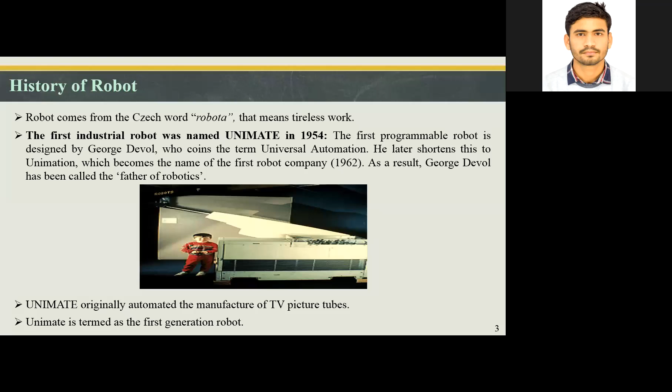The first robot was designed by George Devol in 1954. He also established the first robot company, named Unimation, in 1962. That's why he is considered the father of robotics. His first automation was employed in the manufacture of TV picture tubes.

Unimate is termed as the first generation robots.

Later, in 1980, the robot industry entered a phase of rapid growth. Many industries and industrialists introduced programs and courses in robotics, and thus advancement occurred in the field. In addition, sensing devices and path control capabilities were introduced by this time.

These type of robots are termed as the second generation robot. In the previous slide we showed the automatic manufacture of TV picture tubes; this was the first invention, termed the first generation robot. This type of robot, with the addition of sensing device and path control capabilities, is termed the second generation robot.

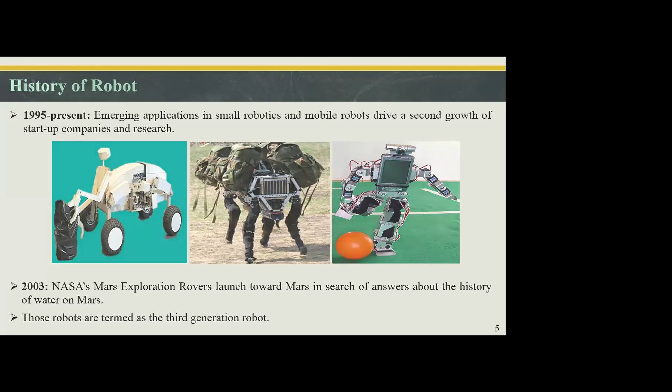So far, we have discussed the history of robot. Now we will go for the term robot. What does the term robot mean? According to the Robot Institute of America, a robot is defined as a programmable, multifunctional manipulator designed to move material, parts, tools, or special devices through variable programmed motion for the performance of a variety of tasks. In short, the thing that is programmable and performs multifunctional capabilities of moving materials, parts, and special devices in accordance to the prescribed program is termed a robot.

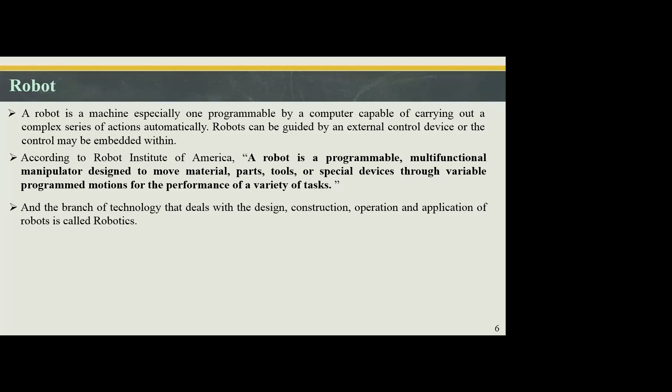The branch of technology that deals with the design, construction, operation, and application of robots is termed robotics. Here we can see three different types of robots doing different jobs: the first one is doing office work, the second one is trying to grip something, and the third one is involved in packaging boxes or some material.

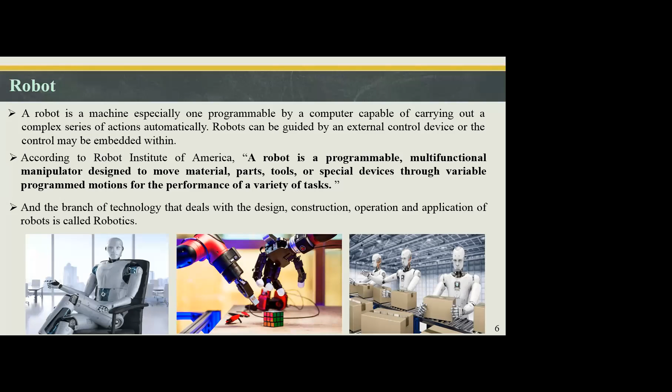Now we will go for robotics and manufacturing, or the relation of robotics to manufacturing. Robotics and manufacturing are termed a natural partnership. For maximum efficiency, safety, and competitive advantage, there is no alternative to automated solutions. In case of repetitive tasks, it is very encouraging to focus on the speed, accuracy, and durability of the robots. In such cases, robotic automation can play a vital role.

Automated robots work efficiently at jobs which are intricate or complex for human beings to perform, such as lifting and holding heavy materials. In addition, robotic automation allows companies to compete in global markets. Besides, this implementation also increases productivity, worker safety, satisfaction, and a better bottom line, or a flexible outcome.

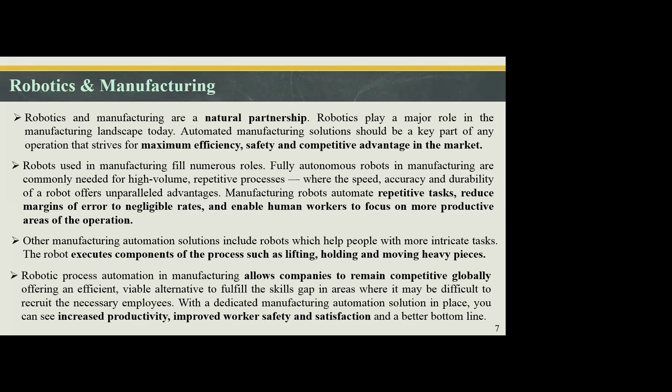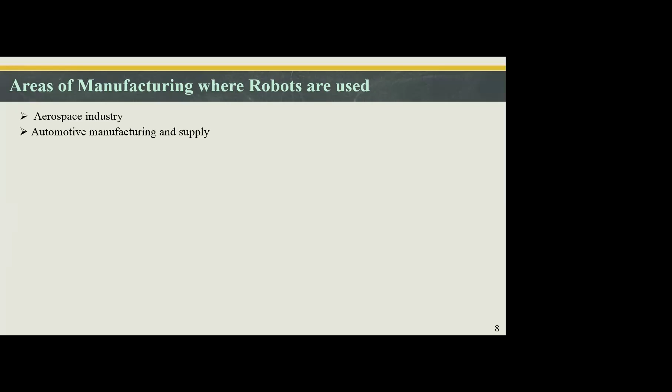Now I will show you some areas of manufacturing where robots are used. Robots are vastly used in the aerospace industry nowadays, and in automotive manufacturing and supply; from the very beginning, robots are used vastly in automotive manufacturing. Robots are now being used in agricultural harvesting and picking up vegetables or other materials.

Robots are also used in chemical, rubber, and plastic manufacturing industries, and in the electrical and electronic sector. Food stuff and beverage manufacturing industries hugely use robots for food preservation units, or to remove chemicals from the food stuff and check whether it is chemical free or not.

In the glass, ceramic, and mineral production industries, robots are used. In 3D printing technology, furniture manufacturing for painting or other tasks, and assembly. In power plants, specifically nuclear power plants, healthcare, hospitals, patient care, surgery research - in these sectors, robots are used vastly. In addition, robots are largely used in laboratories, military sections, mining industries, and different types of transportation devices, and also for entertainment purposes in home or theater.

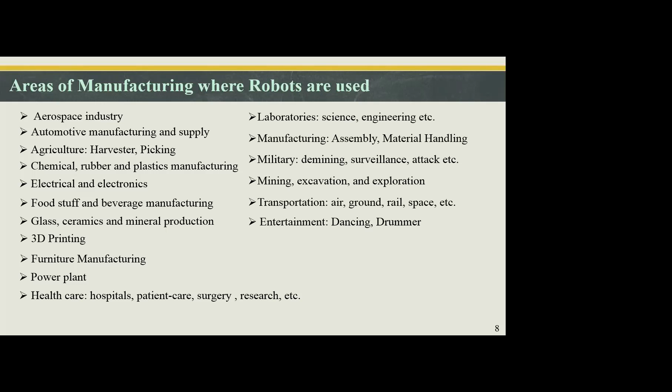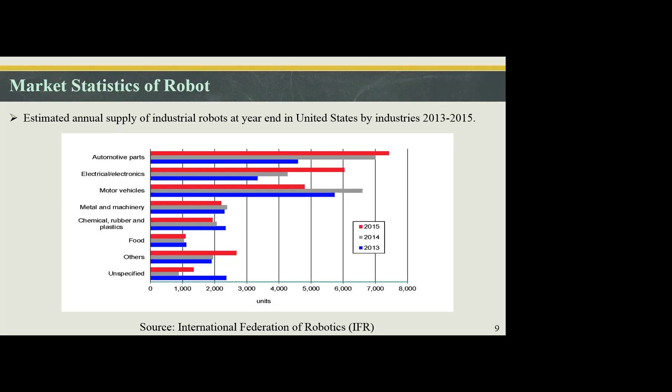This is because of the stable nature of these robots in this arena. This above data has been collected from the International Federation of Robotics, shortly termed as IFR.

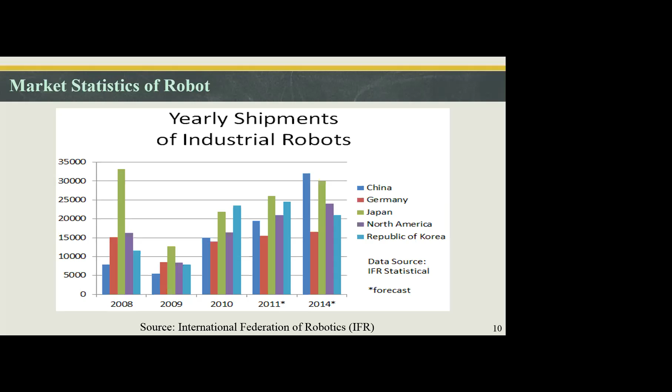In the year 2008, Japan utilized a huge quantity of robots in their production compared to other countries shown here. In 2010, the Republic of Korea consumed robots at a higher rate compared to other countries. But in 2014, China has crossed Japan in the utilization of robots. This statistic is also collected from the International Federation of Robotics, IFR.

Lastly, in this slide of market statistics of robots, I will show you the demand of robots in the factories of China with the advancement of year, and other countries also. In comparison to the previous year, in the year 2014, the utilization of robots increased about 56% in China, 17% in Japan, 11% in United States, 14% in Korea, and 10% in Germany.

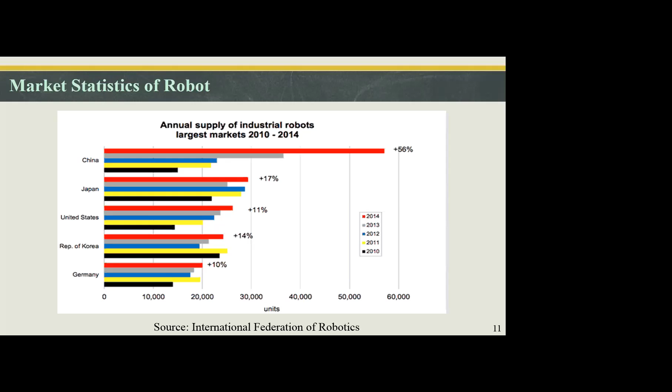From this above discussion of market statistics, we can conclude that robotic automation is the base of modern manufacturing. These are being used in various industries for the increment of production rate.

Here I have tried to show you the main components of robots, which include the arm or manipulator, sensors or sensing devices, end effectors, actuator and drive, and the controller system. These are the main components of a robot. In the picture or figure attached here, we can show different parts in the robots shown here. We will briefly discuss each term or each part.

Firstly, the arm or manipulator. It is termed as the main structural element of a robot. The degrees of freedom depend on the arm. Degrees of freedom means how many directions the robot can move, or its arm can move. That's why the work volume is mostly dependent on the functionality of the arm.

Here we can see a simple robot shown with its arm - this is termed as the lower arm, and this is termed as the upper arm. In case of several arms attached here, these are attached as links, and in some cases the links are also termed as arm or manipulator, which also allows a robot to move in any kind of direction.

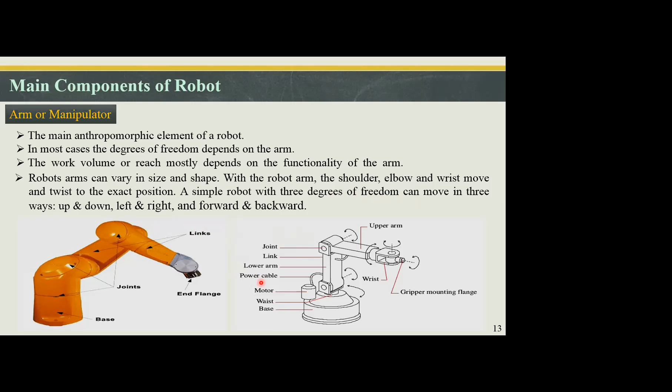Here we can see a simple robot with degrees of freedom in three ways: up and down, left and right, and forward and backward. According to the degrees of freedom or the moving capability, robots are also classified in different ways. We will see these types of terms later.

Now we will go for sensing devices, or sensors. A sensor mainly creates senses in robots. It gives feedback about the surrounding and the environment the robot is working in, and it also collects information and sends it to the robot controller. It also protects the robot from bumping into other robots, and assists different parts or end effectors to work according to the sense it achieved from the surrounding. Here we can see some of the sensors shown here.

The first one is touch sensor, second is ultrasonic sensor which operates on sound from the environment, third is the color sensor, fourth is the sound sensor, fifth is the light sensor, and the last one is the motor sensor. In addition to this, various other types of sensing devices are also available.

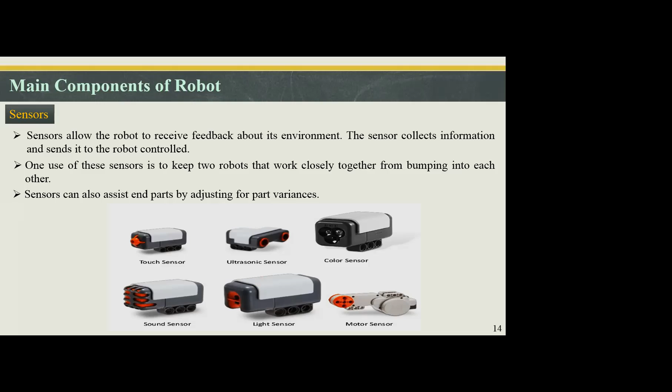The third component is the end effector. This is the device attached to the robot's wrist or arm to perform a specific task, or the part in a robot that performs the specific task, termed as the end effector or end part. Here we can see in the figure a welding torch and a gripper. Some variations of an end effector are gripper, vacuum pump, or magnets. What kind of work I want to do with the robot mainly depends on the end effector attached to it.

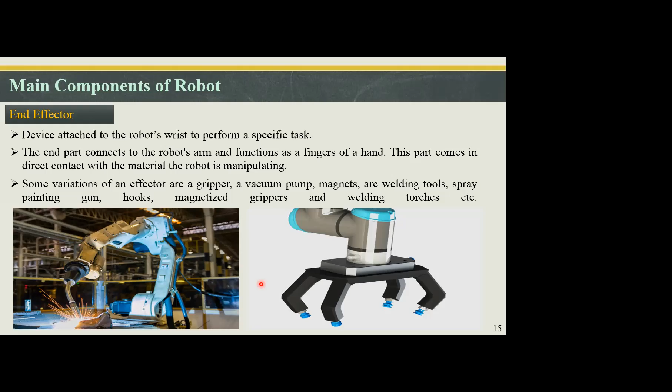Next we will go for the drive system, which supplies the power to drive the robot, and the joints are moved by actuators powered by a particular form of drive system. In robots, we normally use three types of drive systems: hydraulic drives, electric drives, and pneumatic drive systems. The drive system mainly determines the speed of arm or manipulator movement, the strength of the robot, dynamic performance, and some kinds of applications.

What kind of applications will we use for these robots? Hydraulic robots normally provide greater speed and strength. Electric systems provide moderate speed, and pneumatic systems are used for smaller robots. Here we can see some of the drives available: DC motor, which is an electric drive system, and the pneumatic drive system shown here, as well as classic DC motor and industrial servo stepper motor, which are also electric drive systems.

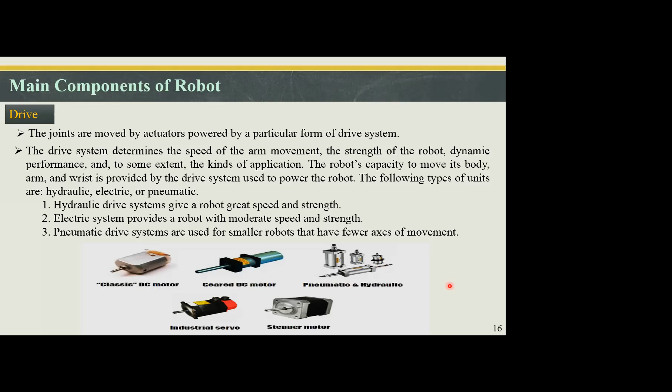What this drive system mainly does is work through the next component, actuators. Actuation is the process of conversion of energy to mechanical form. If we use electrical actuators, this conversion of energy occurs with the help of a motor or gear. If we use pneumatic devices, this conversion occurs through turbines or other kinds of blades. But in hydraulic drives, this conversion occurs through pumps. Actuators are termed as the muscles of robots.

There are many types of actuators available depending on the load involved, or what kind of work we will do through these robots. The term load is associated with many factors such as force, torque, speed of operation, accuracy, precision, and power consumption. These terms are mainly related to actuators in robots.

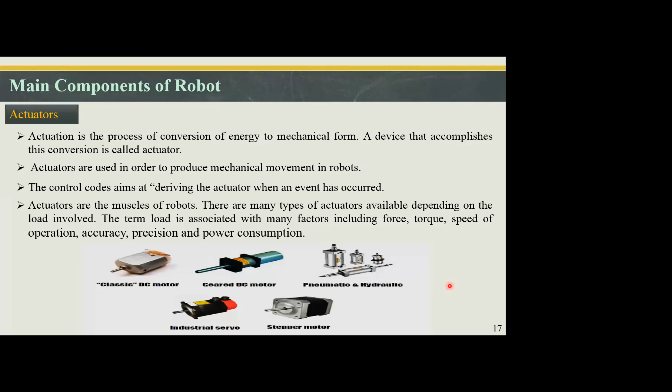The last component, also called the brain of the robot, or the programmed section of the robot, is called the controller. A controller is a device which takes one or more inputs and adjusts its output so a connected device can function in a controlled manner. The parts or components used to control the robot are termed the controller. This controller is termed the brain of the robot. It also networks with other systems so that the robot may work together with other mechanisms, machines, processes, or robots.

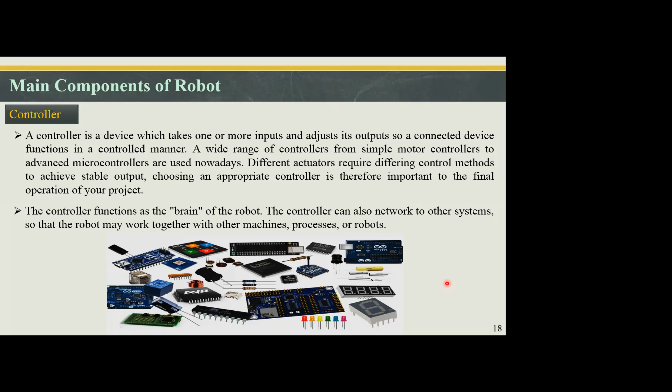Next we will see some applications of robots in different manufacturing sectors. Firstly, robots in material handling. Here we will show some figures of robots performing jobs such as picking up or transferring boxes in a prescribed manner. This type of work is vastly used in manufacturing industries by robots, and is a very common form of robot used nowadays in material handling.

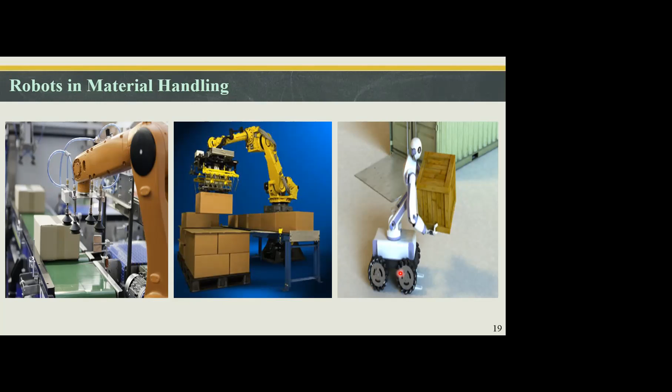Now we will see robots in the agriculture sector. In these three figures we will see how robots are used in agriculture. First one is picking up vegetables from the field. The second is distributing pesticides and monitoring or taking pictures of the field. The third is preparing the land for agricultural purposes. In all these sections, robots are used vastly.

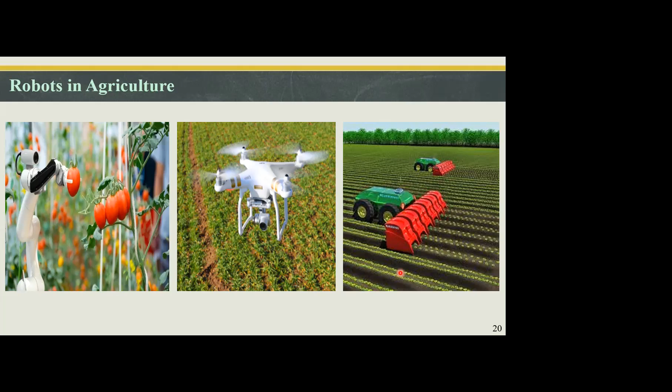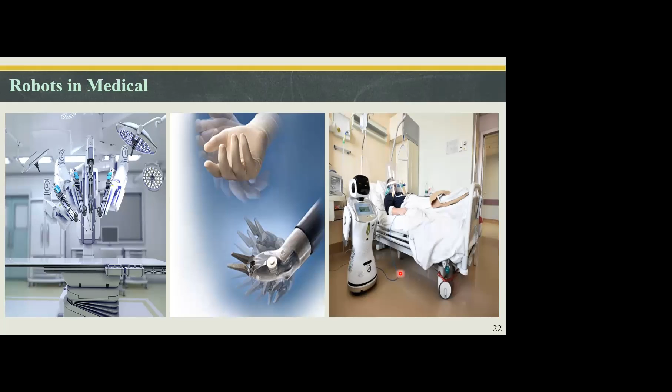Robots in the medical sector. Nowadays in medical sector operation theaters, robotic instruments are used vastly. And in different cases of handling germs, robots are utilized for these hazardous tasks which are harmful for man, or for handling different types of viruses. This type of robot is used.

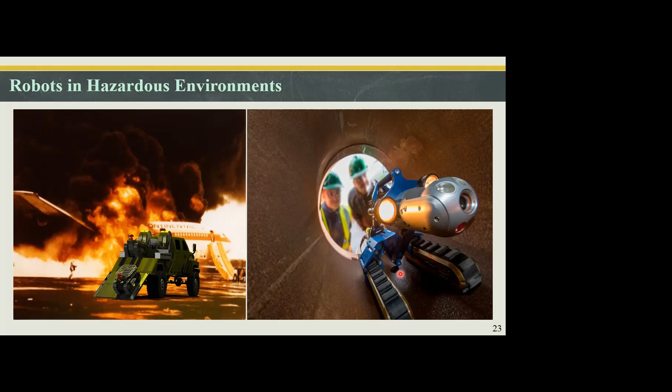Robots in hazardous environments are used in sectors where man cannot enter or handle harmful chemicals. In such environments robots are used vastly to perform the tasks of humans. Mainly this type of robots are used in chemical industries, or industries that work with fire hazards, or where safety from fire must be ensured.

Now we will see the different types of robots normally used in practice or available in market. First, mobile robot: robots that are used in mobility areas such as space robots are termed mobile robots.

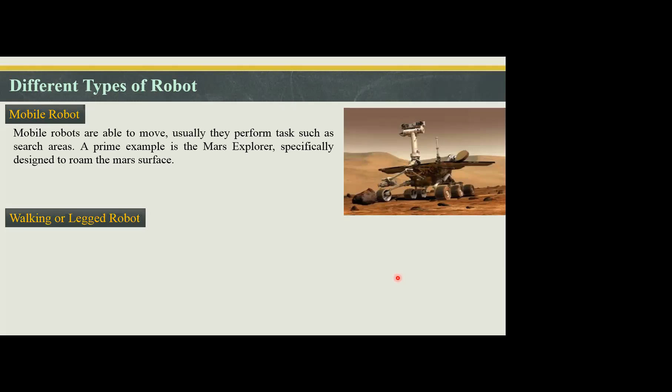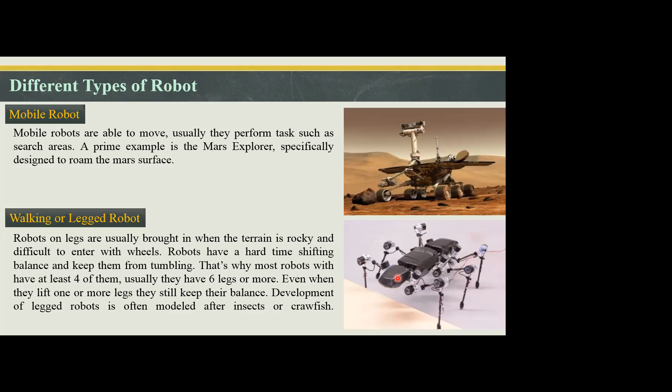Second, walking or leg robots. This type of robot is mainly modeled on the picture of some insects or crawfish. These robots are usually brought in when the terrain is rocky and difficult to enter with wheels, since it is difficult for men to move there and perform research. In this sector, walking or leg robots are used.

Autonomous robot: this type of robot is self-supporting, or in other words self-contained. They rely on their own brains, taking direction from their sensing device to the controller, operating in a self-supporting way. This type of robot is the fourth generation robot, mainly termed fourth generation robots.

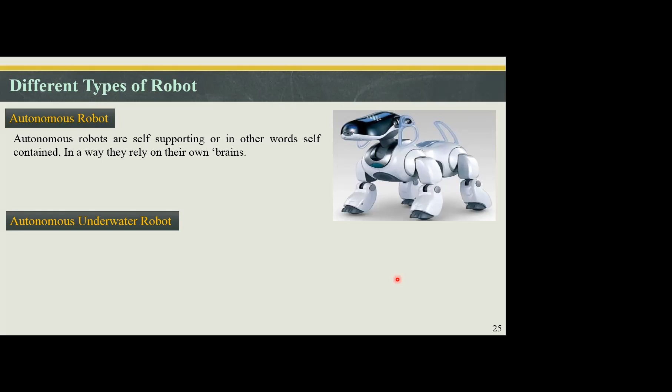Autonomous underwater robot: these types of robots are used in searching or conducting research of soil underwater, or finding the nature of living beings underwater. These are termed autonomous underwater robots.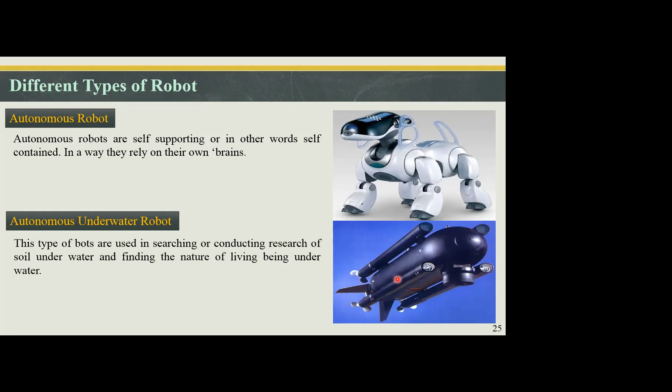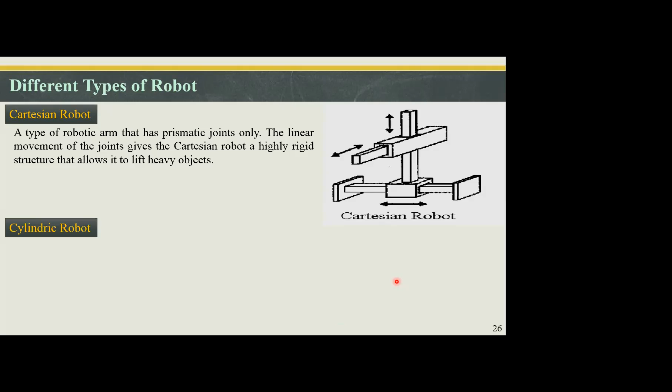Next, Cartesian robot. Cartesian means it is mainly related to the coordinate system. If the robot moves in the x, y, and z direction, this type of robot is termed a Cartesian robot. This type of Cartesian robot has a highly rigid structure that allows it to lift heavy objects, mainly used for lifting heavy objects.

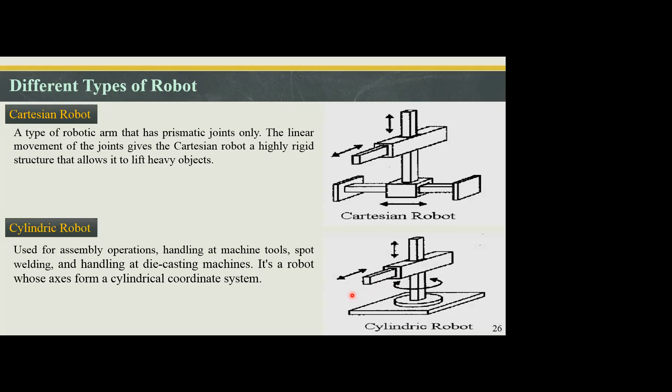Next, cylindrical robot. Instead of just doing Cartesian coordinates, in addition it will also rotate. This type of robot is termed a cylindrical robot, and is used in die casting systems and spot welding systems.

SCARA robot: these are also termed pick and place robots. These robots have at least two rotary joints included, which also permits the robot to move in several ways in comparison with the cylindrical robot shown before.

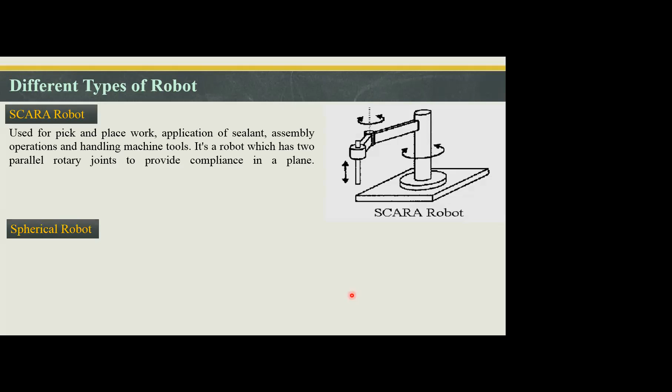Now we will see spherical robot. This type of robot is used in die casting, gas welding and arc welding systems. These are robots whose axis forms a polar coordinate system, as shown in the figure here. The rotation is greater in comparison with the Cartesian robot and cylindrical robot.

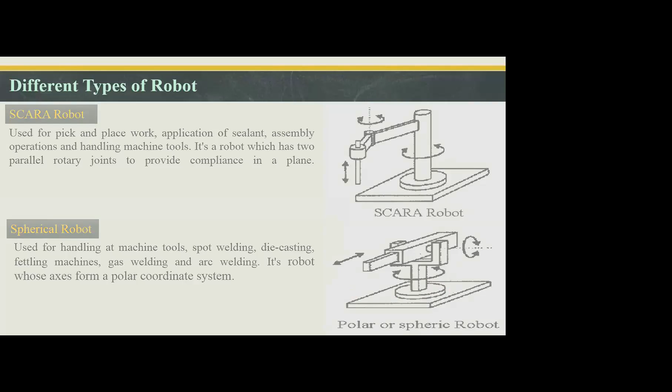Articulated robot: this is a robot whose arm has at least three rotary joints, or many more. This type of robot is used in assembly operations.

Unmanned aerial robot: this type of robot introduces the concepts of robot flight and movement simultaneously, and is used in military institutes or security sections for monitoring purposes.

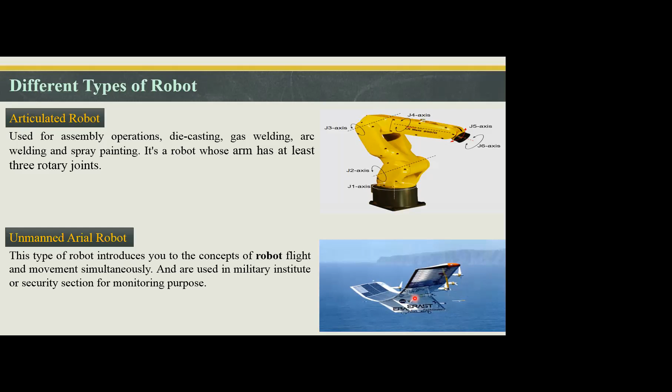Next, washdown robots. This type of robot is used in food processing units to maintain hygiene requirements.

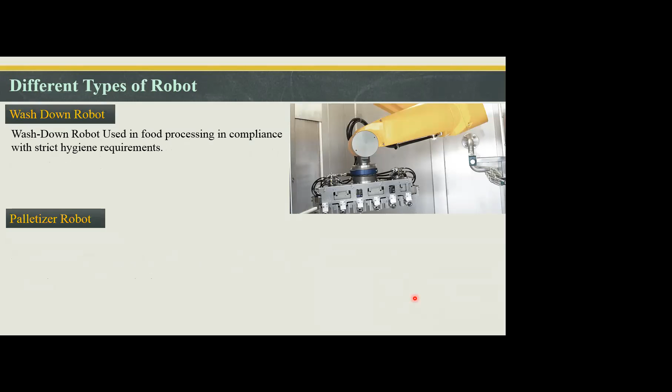Then, palletizer robot. This type of robot is used to bundle and stock boxes into pallets for storage and shipment.

These are all the different types of robots I have shown. The last slide of my presentation will show robotic automation, which is considered the future of modern manufacturing, and why it is considered so.

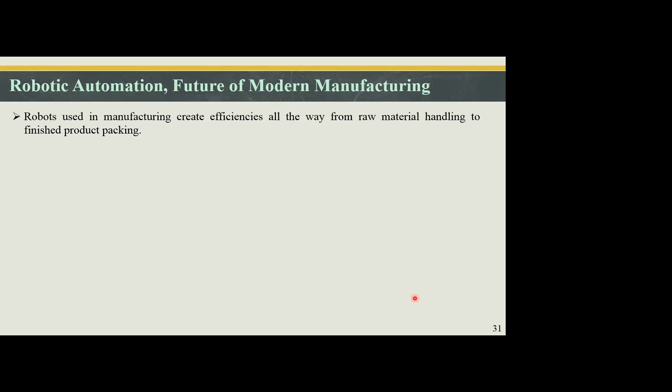Robots used in manufacturing create efficiencies all the way from raw materials handling to finished product packaging. Robots are used vastly in the manufacturing sector. Robots can be programmed to operate 24 hours, 7 days a week in lights-out situations for continuous production.

Human beings are not capable of doing such tireless work 24 hours, 7 days a week, so robots are used vastly in this section. Robotic equipment is highly flexible and can be customized to perform even complex functions which are quite impossible for humans, such as in hazardous environments or fire hazard sections, where humans cannot work comfortably.

With robotics in greater use today than ever, manufacturers increasingly need to embrace automation to stay competitive, leveraging robotic automation for a wider number of applications. Manufacturers increasingly use robotic automation to compete in the global market, as already shown in the market statistics in my slides. Automation can be highly cost effective for nearly every size of company, including small shops.

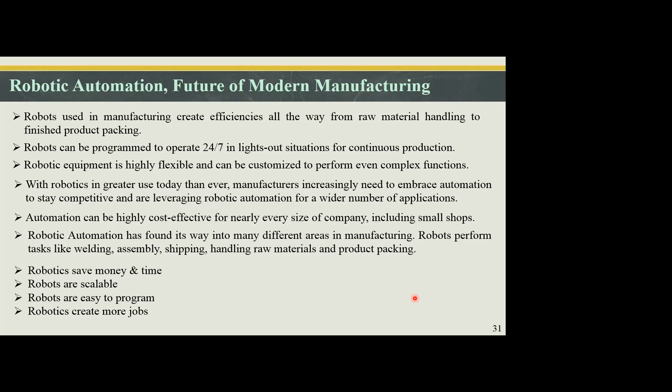Robotic automation has found its way into many different sections of manufacturing. They do work like assembly, welding, shipping, transferring, handling raw materials, and finished product packaging. Besides this, robots also save money and time. They are scalable according to our requirements, easy to program, and create more jobs nowadays. Thank you all for your kind concentration.

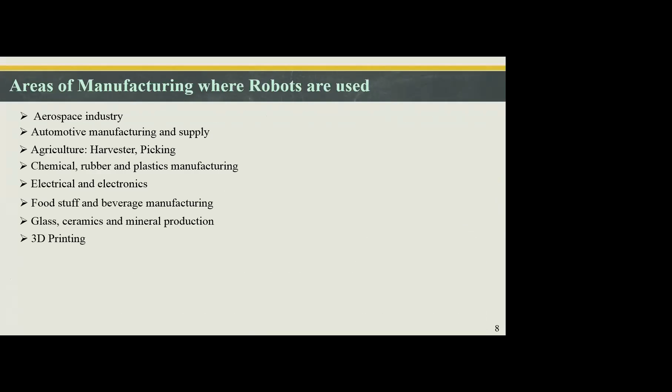Yeah, that's right, Pranto? I have a slide to show the limitations of robots, I can share this. But if we show a program, that's a huge course to show. Simply one program cannot describe a robot.

For robotic controlling systems, I have included a controller section. I added a bit more in my slide, if you allow, please sir? Okay, go ahead. That is another course related topic.

Sir, okay, what I understand is that every robot, particularly manufacturing robots, say in an automotive industry, they are using a particular type of robot which is programmed for doing that particular job. So its program is kind of unique. It will never match with another program or another robot which is shifting heavy loads. Those two are totally different.

Based on that, you can write programs in any language that is suitable for that robot to perform. That is what I understand. Yes, robotics is like that. You design a robot customized for a specific task and you perform that task.

And if you want to modify, then either you have to change the program or you have to change the degree of freedom, movements, and sometimes arms and manipulators. A lot of things need to be changed for an existing robot to do different tasks, even sensory systems and controllers. In some cases you have to change the entire controller. Yes, of course, the same robot cannot be used for all purposes.

Exactly sir, there is no generic program or generic version. Maybe in the future there can be modifications because of artificial intelligence. In future, robots will be able to perform a lot of tasks.

Human assistant robots can perform multiple tasks, like they can cook, serve people, wash the dishes, tidy up the house. This is already in use - they call it humanoid robot. There are multiple. Japan has commercialized these things already, for domestic purposes. They are also being used in restaurants.

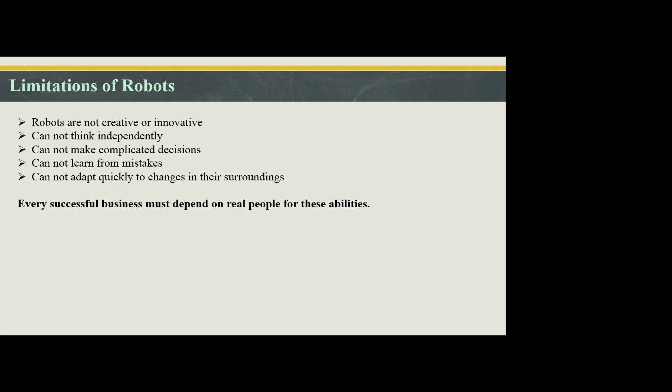We're just discussing, it's not about your presentation actually, just a general comment. I think Russell was quite right - there has been some distraction in your presentation, like there are some robots which are not related to manufacturing. But overall it's a really interesting presentation, because the audience might get a general idea about robots, not only manufacturing ones, and we also need to know different types of robots so we can think of using them in different manufacturing sectors.

If you look at the Mars robot, what are they doing? They're collecting rocks, searching for water, and analyzing various materials. We have to think positively, like how can I use the same robotic system for a different purpose, in a different industry for manufacturing. If you don't have any idea about what type of robots are available, or what type of robots can be made, or the general idea about kinds of robots and kinds of control systems or movement, then you can think of using them in the manufacturing sector - that's also beneficial, it's not a demerit.

Okay, thank you sir. Any other question from anyone? Assalamualaikum sir. Go ahead, Rana. Sir, would you allow me to add something if we have available time? Sure, we are having an open discussion.

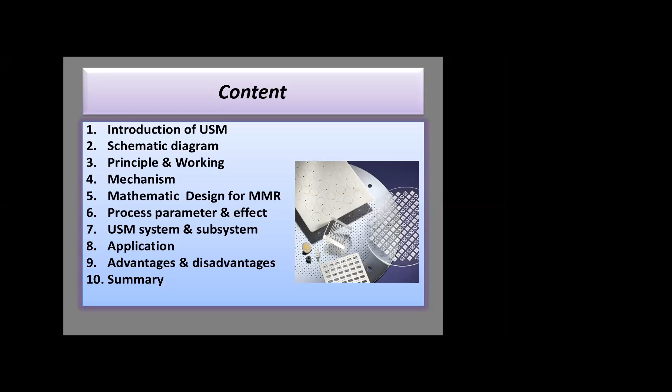So first, what is ultrasonic machining? Ultrasonic machining is changing the manufacturing industry. It has superlative performance. The main reason this process is used in manufacturing is because it involves less heat in the process. All operations done with ultrasonic machining methods are cost effective and give the best results.

Ultrasonic machining is an abrasive process which can machine any hard and brittle material with the help of its vibrating tools and the indirect passage of abrasive particles towards the workpiece. It's a low material removal rate machining process.

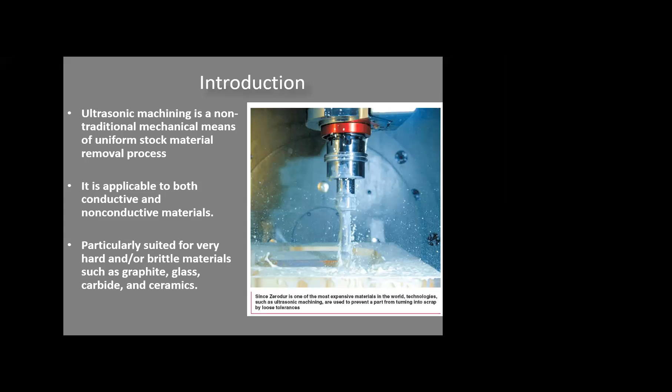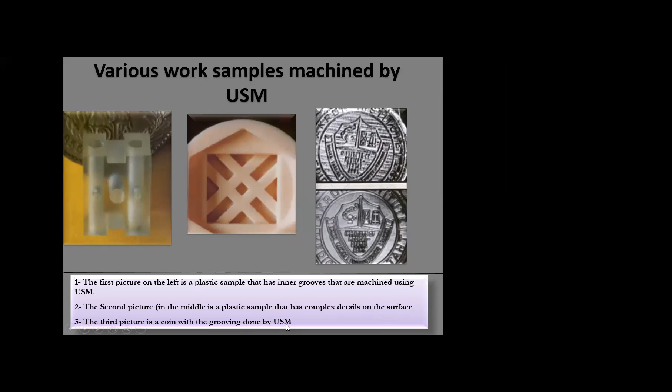Here is my second slide, showing various work samples machined by ultrasonic machining. The first picture on the left is a plastic sample with inner grooves machined using ultrasonic machining. The second picture in the middle is a plastic sample with complex surface details.

I'm going to tell you about my next slides. First, the principle of working: the process is performed by cutting tools which oscillate at high frequency, typically 20 to 40 kilohertz, in abrasive slurry. The tool is gradually fed in with uniform force.

The high speed reciprocating of tools drives the abrasive grains across a small gap against the workpiece. The impact of the abrasive is the energy principally responsible for material removal in the form of small wear particles that are carried away by the abrasive slurry. The tool material, being tough and ductile, wears out much slower.

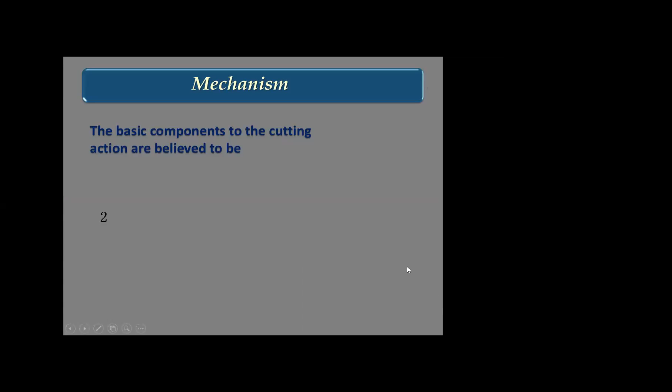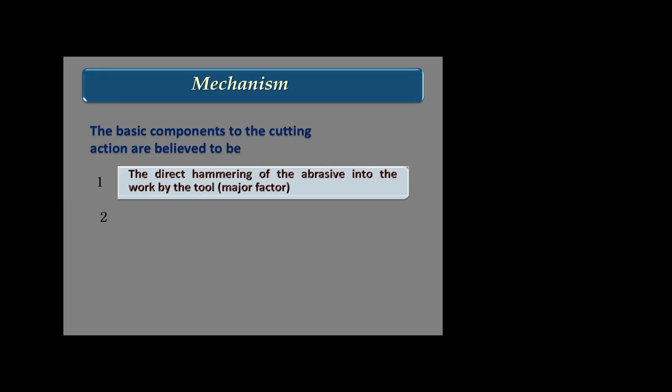So the mechanism, the basic components of the cutting action, are believed to be the direct hammering of the abrasive into the work by the tool. This is a major factor. The impact of the abrasive on the work, then cavitation induced erosion, and chemical erosion caused by the slurry.

To start the machining process, power is required. This is essential, as the diagram shows, the first is connected to the power supply. The second one is the transducer.

Two types of transducers are used in ultrasonic machining to convert the supplied energy to mechanical motion. They are based on two different principles of operation: one is magnetostriction and the other is piezoelectricity.

Magnetostriction is when the material is placed in a sufficiently strong magnetic field, the magnetic moments of the domain rotate in the direction of the applied magnetic field and become parallel to it. During this process, the material expands or contracts until all domains have become parallel to one another.

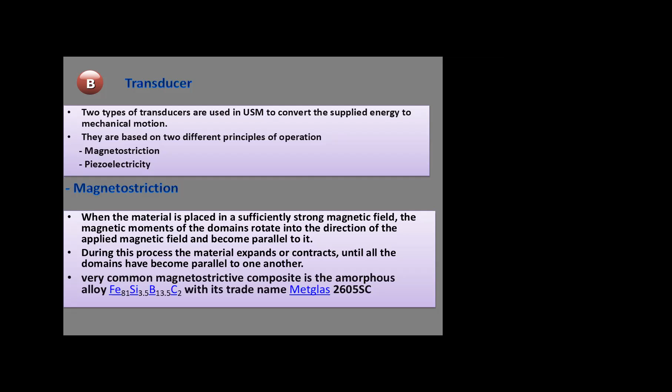Piezoelectric transducers, such as quartz or lead zirconate titanate, generate a small electric current when compressed. Conversely, when an electric current is applied, the material increases minutely in size. When the current is removed, the material instantly returns to its original shape.

The tool holder, or acoustic head, functions to increase the tool vibration amplitude and to match the vibrator to the acoustic load. It must be constructed of a material with good acoustic properties and be highly resistant to fatigue cracking.

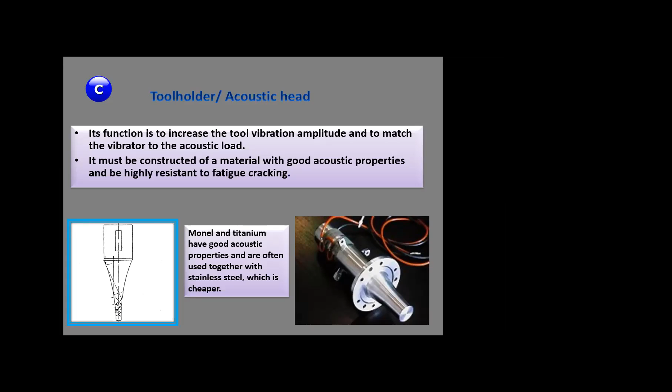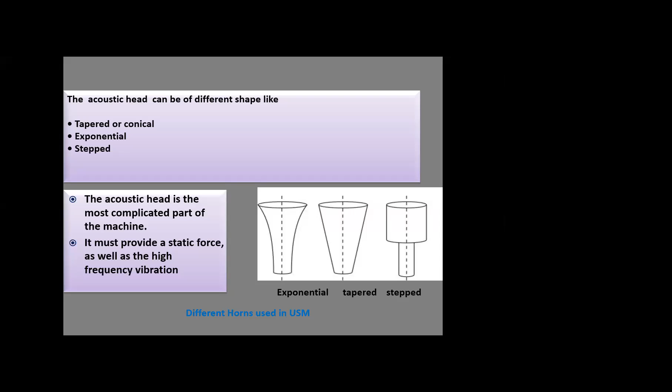Here's a picture shown here. The acoustic head can be of different shapes like tapered or conical, exponential, and stepped. The acoustic head is the most complicated part of the machine. It must provide a static force as well as high frequency vibration. There are three figures shown: exponential, tapered, and stepped.

Now the tools. The tools should be constructed from relatively ductile material. The harder the tool material, the faster its wear rate will be. It is important to realize that finishing or polishing operations on the tools are sometimes necessary because their surface finish will be reproduced in the workpiece.

The geometry of the tool generally corresponds to the geometry of the cut to be made. Because of the overcut, tools are slightly smaller than the desired hole or cavity. The tool and tool holder are often attached by silver brazing.

The most important thing is the abrasive. Abrasive slurry has common types of abrasive: boron carbide, aluminum oxide, or silicon carbide. The most common liquid carriers are water, benzene, glycerol, and oils, and high viscosity decreases the material removal rate (MMR).

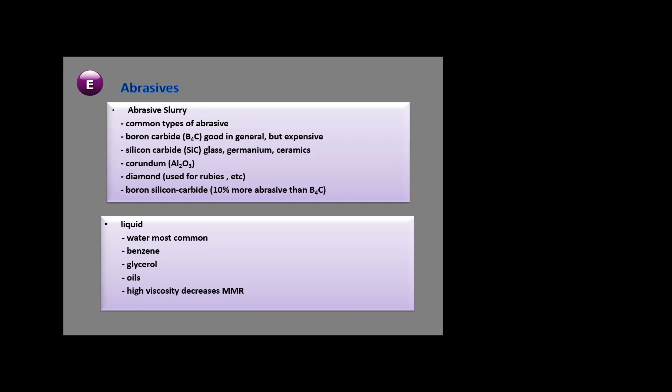The applications of ultrasonic machining are mainly for drilling, grinding, profiling, coining, piercing of dies, and welding operations on all materials which can be treated suitably by abrasives. It is used for machining hard and brittle metallic alloys, semiconductors, glass, ceramic, carbides, etc., and for machining round, square, irregular shaped holes and surface impressions.

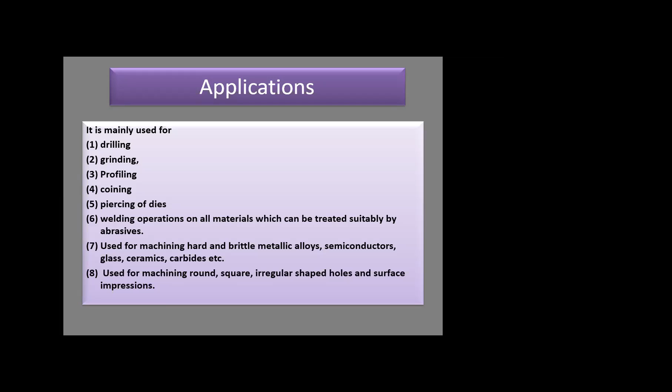The advantages of ultrasonic machining: it can machine any materials regardless of their conductivity, and is applied to machining semiconductors such as silicon and germanium. USM is suitable for precise machining of brittle materials. It does not produce electric, thermal, or chemical abnormal surfaces, can drill circular or non-circular holes in very hard materials, and causes less stress because of its non-thermal characteristics.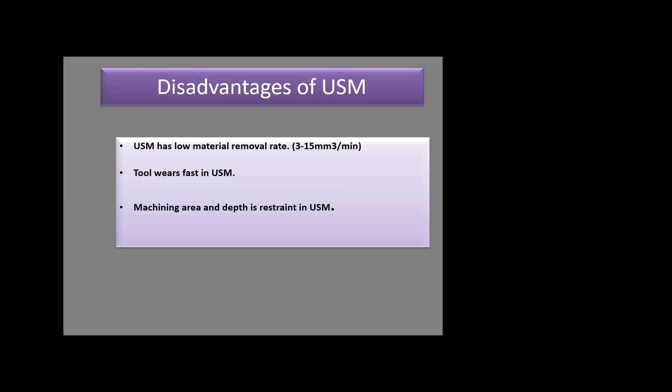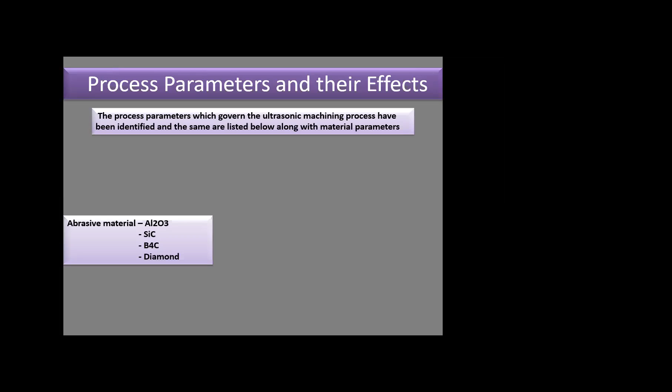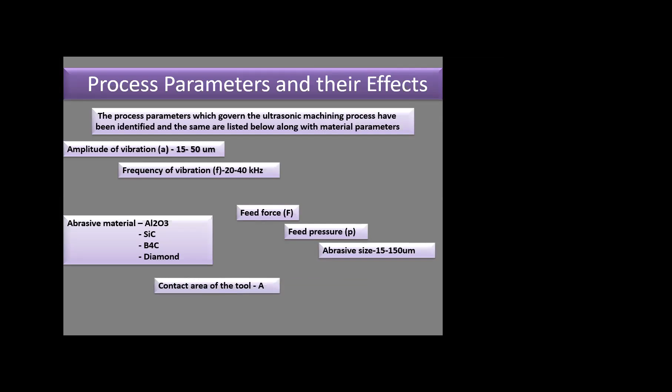Process parameters and their effects: the process parameters which govern the ultrasonic machining process have been identified and are listed in this slide. First is amplitude of vibration, next is frequency of vibration, feed force, feed pressure, abrasive size, contact area of the tool, volume of abrasive slurry, and flow strength of the tool and workpiece.

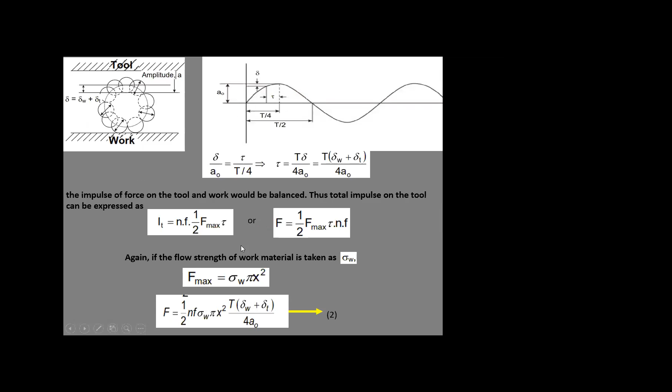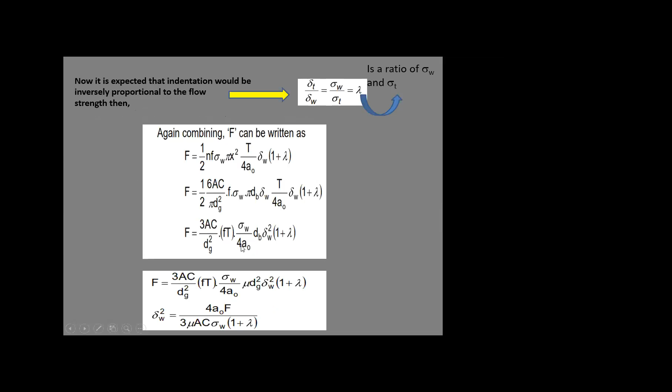Some mathematical derivations of material removal rate have been shown in this slide. Continuing here, the impulse force on the tool and work would be balanced, and thus the impulse on the tool can be expressed in this way. Here are the slides for the derivations, and finally we have obtained the material removal rate.

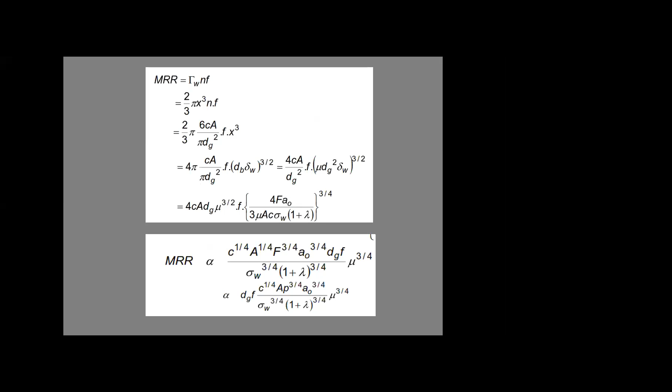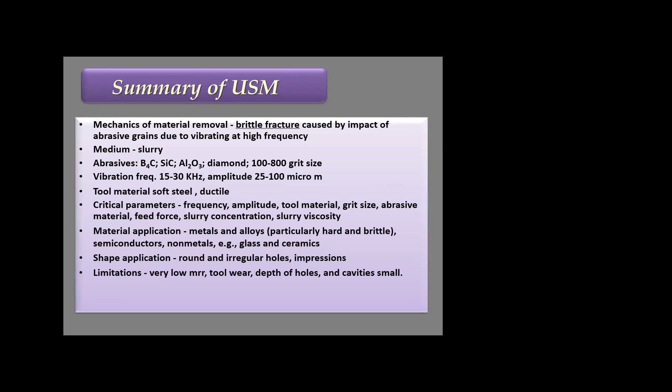So the summary is here. That's all of my presentation. Thank you very much.

Okay, thank you, Tarin, for the presentation. Any question from the audience? Sir, I have a question. Okay, go ahead.

Sir, I want to ask about ultrasonic machining. From the name itself, it is understood that the sound frequency should be above, as the slide also said, 20 kilohertz. That is the frequency of sound production. Yes sir, but the tool head and other mechanism, I couldn't understand how it is impacting the brittle material. I mean, sound has to be propagated - how is the sound generated? Beyond that ultrasonic range, that is 20 kilohertz and above, is called the ultrasonic range of sound.

Okay sir, Tarin can you explain? Okay sir. First, the power supply is connected with the electromechanical transducer, and that electromechanical transducer is connected in that portion. There is a magnetostrictor where magnetostriction occurs, and from that area the ultrasonic sound has been generated.

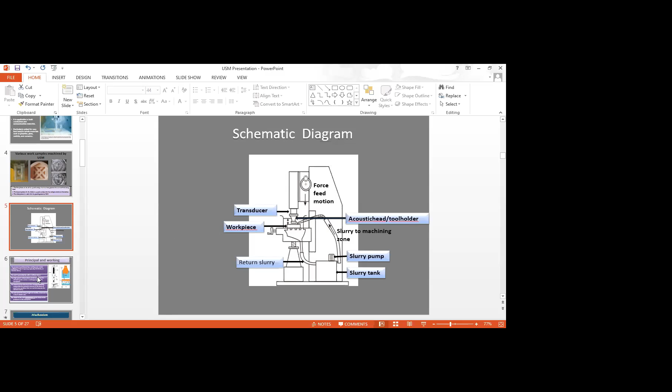I think in your next slide, can you go to the principle and working slide - this one. Yep, can you increase the size of the image on the right side?

So to my understanding, there is one thing, though I may be wrong. Everything, including every living being, has a natural frequency of vibration. There's something called resonance - if something goes into its resonance frequency, the material will fail. So is the tool head producing ultrasound in that range, taking the material to its natural frequency of vibration, so that the material fails and is removed? Is that the working principle of ultrasound for removing material from a workpiece?

I don't think so, it's not like that. First, I think we should give the opportunity to Tarin to describe the principle here, and then I will clarify it. Sir, here the principle has been shown in the slide. No, don't just show the slide - talk. Working principle, sir.

When the tool is supplied with an electric current and high frequency, it will generate vibration of low amplitude. There is a slurry which is already passed from the bottom side, so the corrosion or similar issues will not happen in such a way.

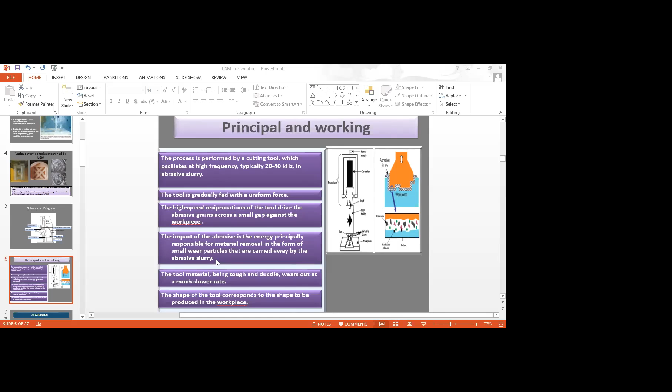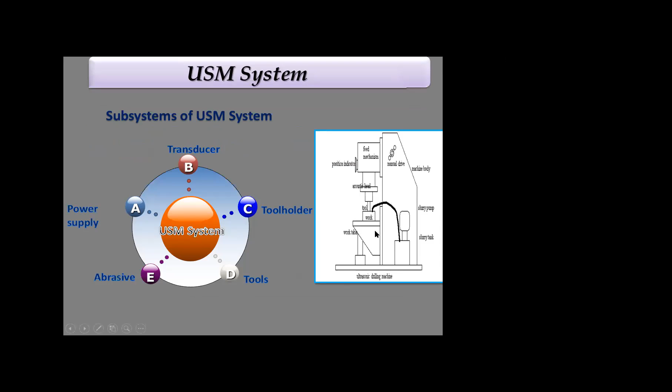Can you expand your slide? Can you make it full screen? Okay sir, full screen, how material is removed. The principle of material removal - can you go to the next slide? Yes, I think that's it. No, a diagram is shown on the right side, not this one. I'm talking about the principle, the working principle page, right side of the principle. Here is a picture - just stay here.

I'll talk. Okay, so how material is removed - when the tool vibrates at a very high frequency with low amplitude, there is a small gap between the tool and the workpiece, and the slurry stays in that gap. If you see the picture on the right bottom, the slurry has some abrasive particles like silicon carbide or aluminum oxide. Due to the vibration of the tool, these particles move very fast, and they strike both the tool and the workpiece at very high speed. The wear rate of the particles is very low compared to the workpiece that we want to remove material from. Due to the continuous strike of these particles on the metal surface, the surface gets eroded, and that's how material is removed.

Just like the sanding operation to remove material - so, I understood, sir. Can I add something with your permission? Yes, of course. What I understood is, as you said, the sandblasting in our shipbuilding industry - we use a similar kind of air force, I mean the force of compressed air, and along with that we send it through a venturi.

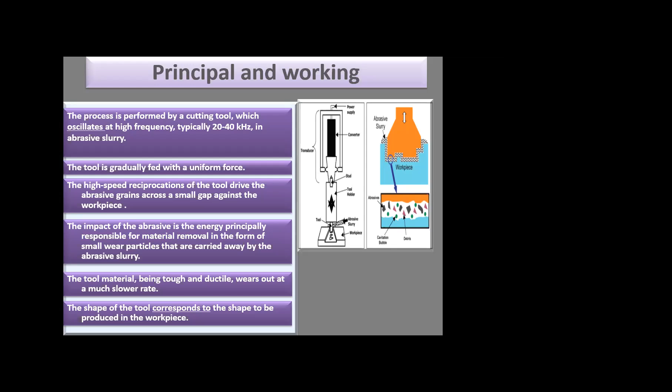Also, when you show the material removal rate equations and derivations, if you don't want to discuss the derivations, just skip that. Discuss the assumptions and parameters, then go to the final equation and explain it. What factors does the material removal rate depend on? Can you go to the image where you showed the material removal rate for various parameters?

The graph. Here. In this graph, there's a lot to discuss, but you did not do that. I think you have lagged in your study.

We understood that Q is the material removal rate. What is F? Force, generated force, total force - that's what you need to explain. The first graph is about material removal rate based on the force generated during machining, and also the area for various areas of material removal.

And the second, what is A naught? The area, sir. Okay, so how does material removal rate depend on area? It's linear - material removal rate increases with the increase of area, and at the same time, for a constant area, material removal rate also increases with the frequency f.

Force or frequency? I think that's frequency, sir. Small f is supposed to be frequency, hertz. Yes sir, frequency. What is dg? Small dg, on the left side, second figure.

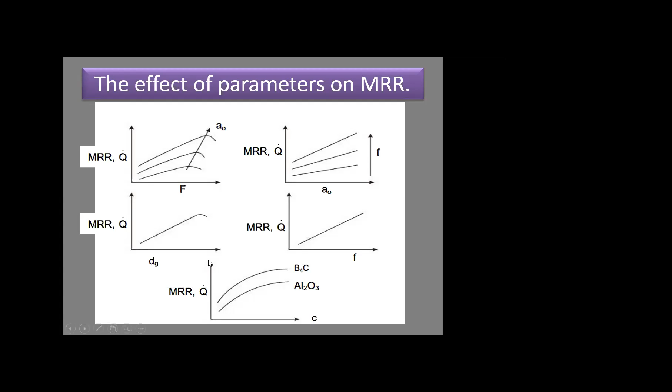Sir, this time you're not sure. If you look at the equation, can you go to the material removal rate equation? This is the concentration of abrasive, sir. Yes, C is the concentration - the concentration of abrasive grit. So the explanation will be, sir, with the increase of C, the rate increases. This C, sir, is the concentration of abrasive grits in the slurry. So that's how you actually describe this.

Okay, anyway, I think you'll really improve in your next presentation, and I hope so.